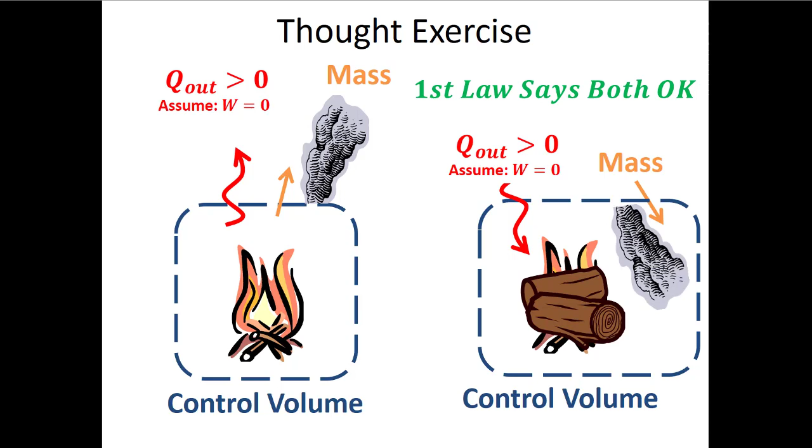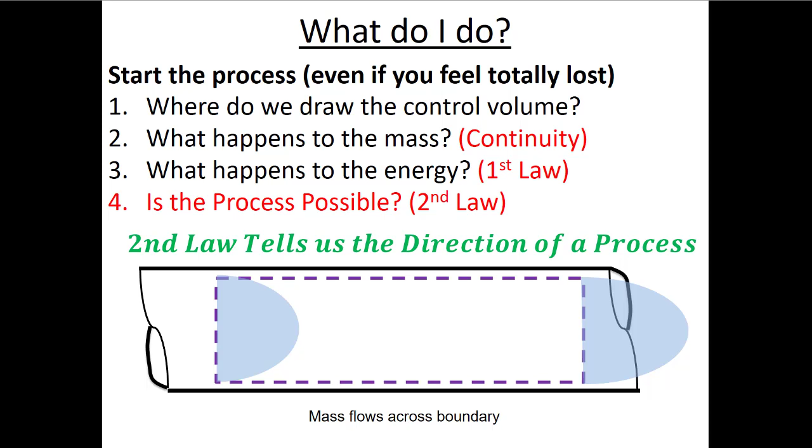So there is a natural direction that different processes follow. In order to figure that out, we have to do a second law analysis. We have to show that the amount of entropy in the universe is increasing with the process you're proposing or evaluating. Because if the entropy in the universe is decreasing as a result of this process, it means that process cannot happen. So how do we check to see if we're violating the second law?

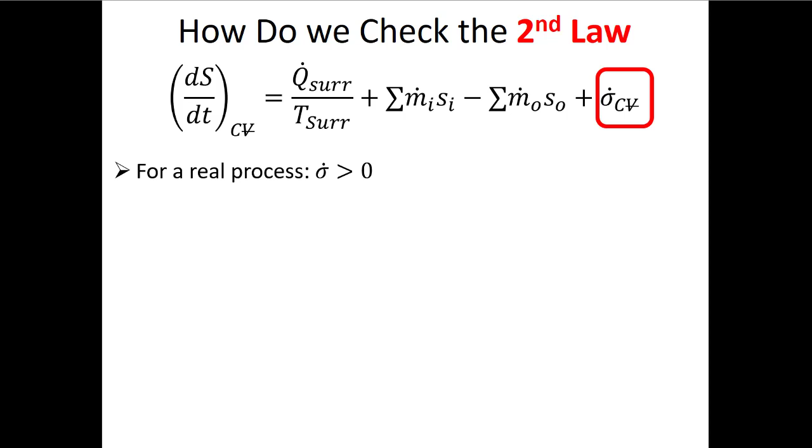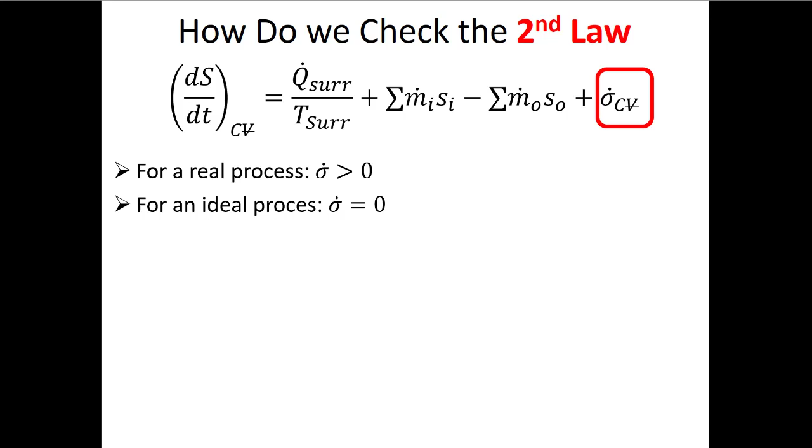So here we have the rate form of the equation, and it's really this entropy generation term, sigma dot, that's going to tell us whether or not we're in violation of the second law. For real processes, sigma dot must be positive - for this to happen in the universe, we must be generating entropy. The best we could ever hope to approach, but not necessarily attain, is this ideal process where the entropy generation rate is zero. Now this is still impossible, but it gives us the limit of what's possible.

If we ever find a process, if we do an analysis where sigma dot is less than zero, it means one of two things. First, the process is not possible, or if we know the process is possible and we're getting a negative entropy generation rate, it might mean we made a mistake somewhere in the math.

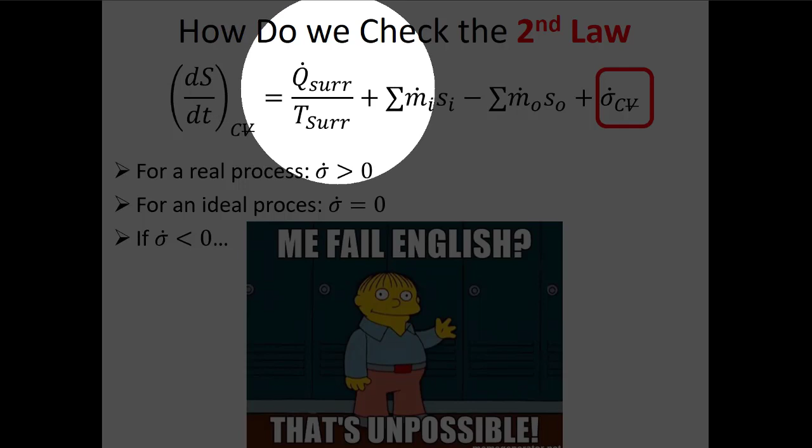Now, last class we looked at how to do a second law analysis on adiabatic processes - we looked at turbines and pumps. But a lot of times the more difficult part with the second law is adding this heat transfer term, because first you've got to get the sign of the heat transfer right. And if you trust the first law when you're calculating Q dot, you'll get the right answer for this.

But then you've got to pick the right temperature. There's two things about the temperature that we have to remember. The first is that because this is not a temperature difference, this temperature has to be in absolute temperature. So if you're doing metric, that means it's Kelvin. And if you're doing imperial units, that means it's Rankine.

Second, this is not the temperature inside your control volume. This is the temperature - I think in the textbook it talks about it being the temperature on the boundary between the control volume, between your system and your surroundings. So oftentimes we will take the temperature outside your control volume, or the surrounding temperature, as a reasonable value for this T surroundings. So when this heat transfer term sticks around, you got to get the right Q dot, you got to pick the right temperature, and you have to pick the right units for the temperature.

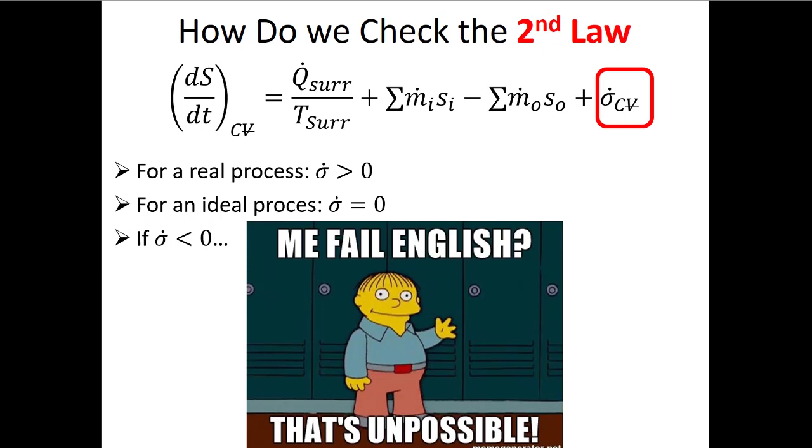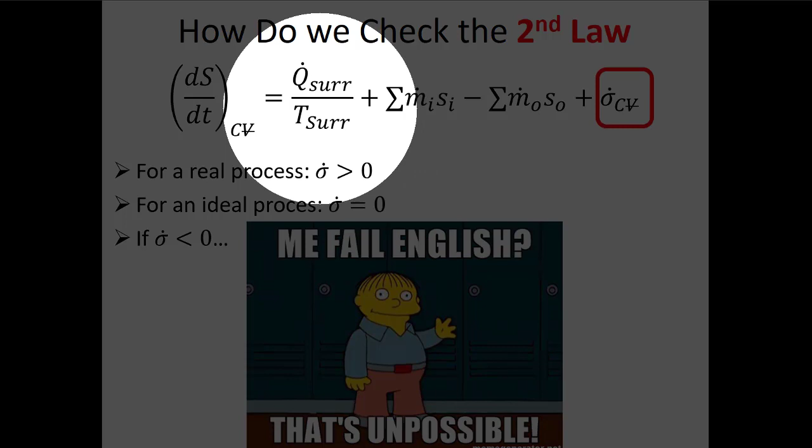So when people make mistakes on exams or on quiz questions for this type of problem, it's because they mess up this heat transfer term. So we're going to show you how to do that today.

We looked at a pump where we went from the low pressure of the turbine exit, where ideally it's still steam when it comes out, not condensed, because these turbine blades are whipping around really fast. You don't want little droplets of condensate inside your turbine because it can cause damage. So you want still steam coming out of your turbine, but it's low pressure. And because it's got less enthalpy, we want to get back to this high enthalpy state so we can run the turbine again.

Now, one of those processes: we have steam, but we want to get to water, because it doesn't take much power to increase the pressure of water. Then we need some kind of exothermic reaction, usually burning something like coal, but it could also be a nuclear reaction, which generates a lot of heat. We put that heat into our high pressure liquid water to boil it and get back to the inlet of the turbine.

So that means in our second law we also have this heat transfer term, and this term has to be bigger—there has to be more entropy generated because we're adding heat to the system than there is entropy lost by cooling this down. This isn't as much of a problem when we're heating things up, because there we're increasing the entropy. So we're going to look at the condenser here because this is the point where maybe we get a little bit of a problem, or at least conceptually you might look at this and say, oh, maybe here we're not generating entropy.

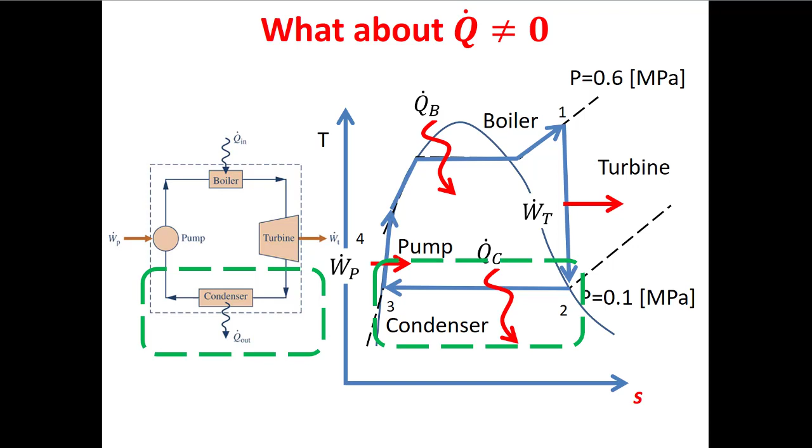So I'm going to show you that this is indeed a possible process. Here we have the condenser side of our heat exchanger. We're coming in at state 3, which is at 0.1 megapascal, and the quality is 1—this is the exit of my turbine, I have saturated vapor. Now, the purpose of the condenser is to condense this steam into liquid water, so when we leave our condenser, we have fluid coming out at the same pressure.

We're going to neglect any kind of losses from friction that would lower our pressure here, and we're going to assume that this is saturated liquid. So we've gone from saturated vapor to saturated liquid.

Now, it tells us here that the temperature on the boundary, or the temperature outside—this T infinity means kind of far away from the boundary—is 40 degrees Celsius. We'll take that as the temperature of the surroundings, which we're using as a proxy for the temperature on the border between our system and our surroundings. We're also told the mass flow rate. First we're supposed to find the heat transfer, or rate of heat transfer, Q dot, and we're also asked, is this process, this condensation process, possible? Does it still have a positive entropy generation rate when we're performing this condensation?

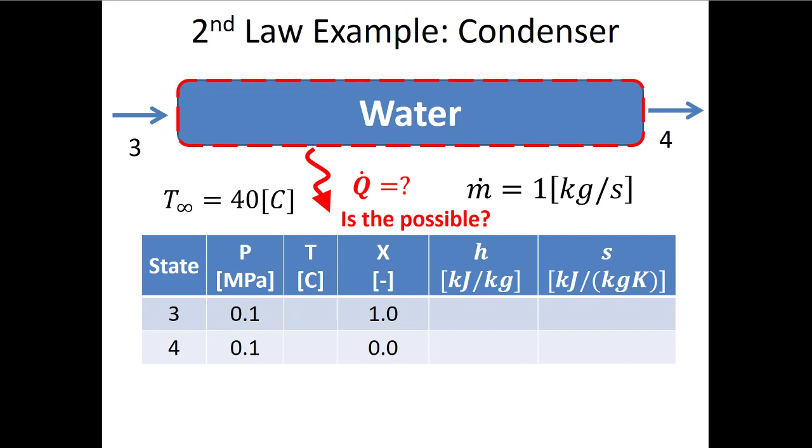So the first thing I'm going to do is draw my control volume. We've seen for heat exchangers that you can draw control volumes in different ways, but here, because I want to find the heat transferred, I'm going to only draw my control volume around the water phase. There's something else we're using to cool down this water so it condenses—I don't even know what it is, so I don't have much choice here, but it's a happy coincidence because it'll help me find this heat generation rate. So first I draw my control volume, and I want to find the symbolic solution for Q dot.

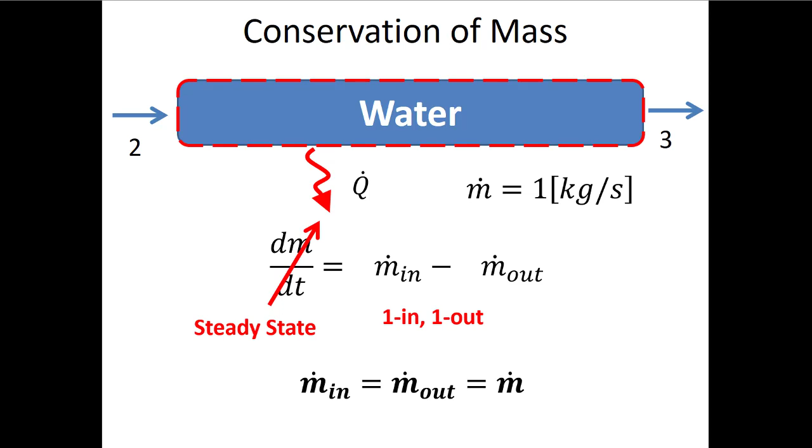So the first thing I have to do after I draw my control volume is conservation of mass. This isn't too bad because we have one inlet and one outlet, so we'll say this process is at steady state. I only have one inlet state, state 2, and one outlet state, state 3. So my summation signs in conservation of mass go away, and I find that m dot in is equal to m dot out. For this condenser, I'll only talk about one mass flow rate, so I'll drop the subscripts—it's just m dot, equal to 1 kilogram per second.

Now that I've done conservation of mass, I can do a first law analysis. I've already assumed we're at steady state with one inlet and one outlet. Next I'll assume there are no fan blades inside my control volume, so this process is passive. I'll assume the change in elevation is negligible, so the change in potential energy can be neglected, and we'll say the same about the change in kinetic energy—that can also be neglected. What we get is Q dot equals m dot times h out minus h in. Hopefully this isn't surprising—it's what we'd expect.

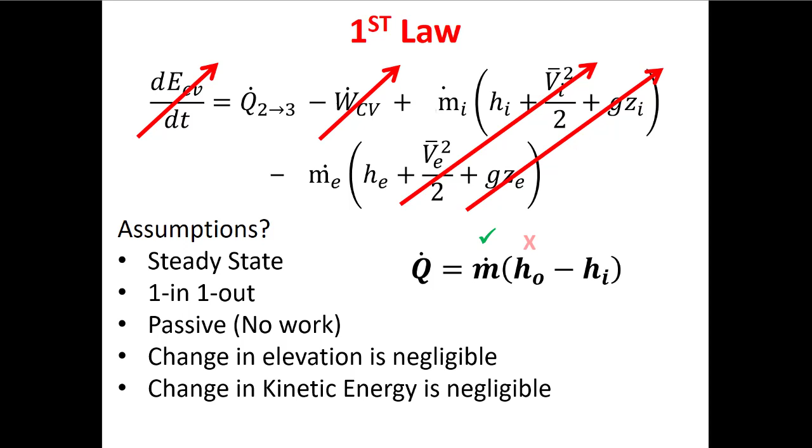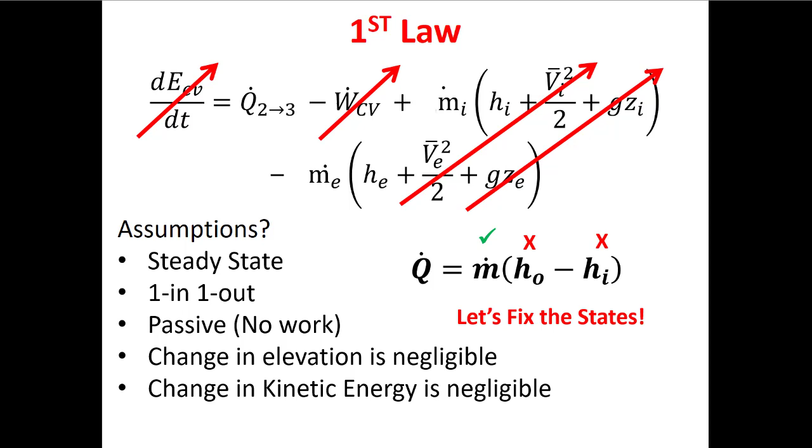So we want to know Q dot, but we don't know it yet. We're told the mass flow rate, and we've shown there's only one—m dot in and m dot out are the same. I don't know h out, and I don't know h in. So I've got one equation and three unknowns, but that's okay because I have thermodynamic tables. We'll fix the states to find these specific enthalpies. Since I'll also do a second law analysis later, I'll look for specific entropies, little s, as well.

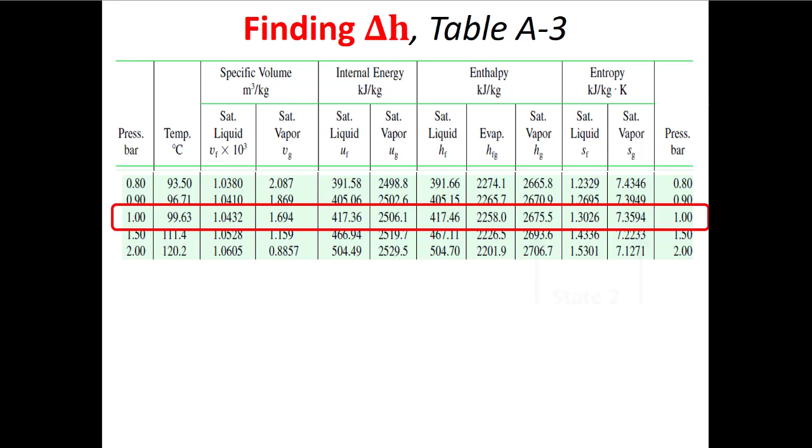So I have my state table. States 3 and 4 are given—actually, in my state table this should be state 2 and state 3, sorry about that. We're moving from a point at 0.1 megapascals, or 1 bar, with a quality of 1, to a point at the same pressure but quality of 0. First we'll fix this state, a saturated vapor at 0.1 megapascals. I go into table A3 and find my pressure—remember it's in bar, so 0.1 megapascals is the same as 1 bar. I look at this row and find Hg, since quality equals 1, and Sg, the specific entropy when quality equals 1. I'll put these two numbers into my table.

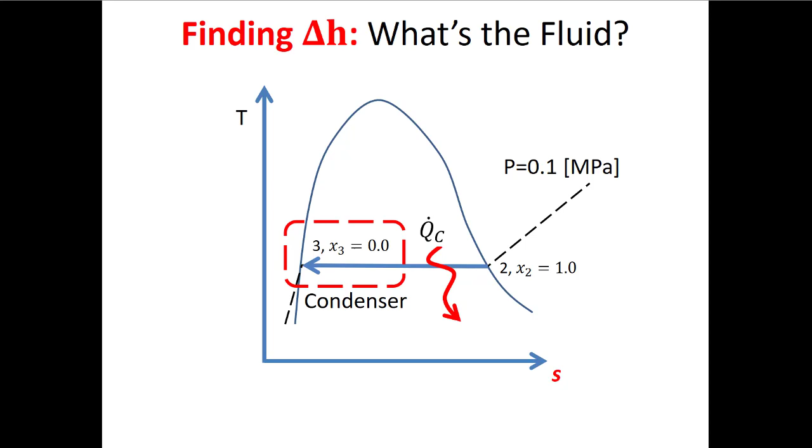Now I'm going to find state 3. Looks like I've fixed my state table—this is 2 and 3. At state 3 it's a similar situation, but saturated liquid, so the quality is 0. I'll be looking for Hf and Sf. Going back to my table, it's still the same pressure, so no interpolation required. I have Hf and Sf, and I can put those numbers into my table.

What we see here, and this is expected as we move from steam to liquid, is that we're losing enthalpy—there's less energy stored in the mass—but we're also decreasing the specific entropy. This is a little worrying because my credibility is on the line here. I've been telling you that the entropy of the universe always increases, but as my brother pointed out, the entropy of the water has decreased.

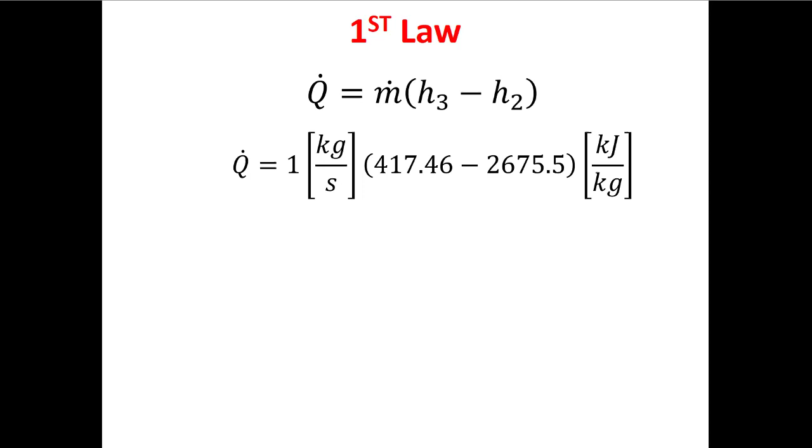But now we have enough information to find Q dot, and once we find Q dot we can move to a second law analysis. So the magic here is in the heat transfer. We'll find the heat transfer rate from our first law equation. We've already made some assumptions, and we know Q dot equals m dot times H out minus H in, so H3 minus H2 in this case. I have numbers for all of these things: m dot is 1 kilogram per second—remember, I carry my units in the calculation—H3 is 417.46, and H2 is 2,675.5.

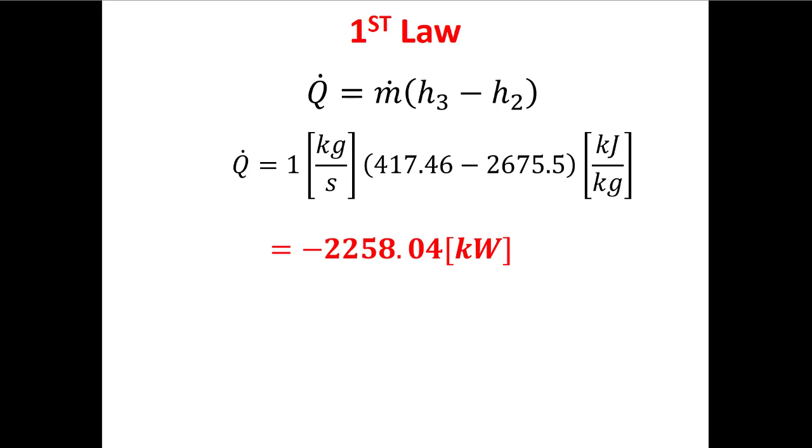Both of those pieces of information, the specific enthalpies, are in kilojoules per kilogram. So now my kilograms are going to cancel out in this equation, right? Because one's in the numerator, one's in the denominator. I'll get kilojoules per second, which I know are kilowatts. In particular, I get 2,258 and change kilowatts.

So now I know Q dot, right? That's pretty good, because that was one of the things the problem was asking me. So now I've demonstrated that I know how to do conservation of mass, I know how to do conservation of energy, and if I put those two things together, I can find the heat transfer rate, the rate at which heat is leaving the water because of this condensation process.

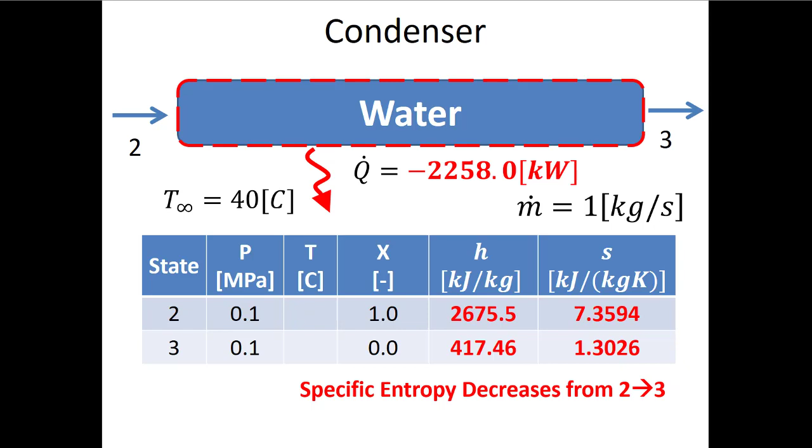So I see here, and maybe I'm a little nervous about this, that the specific entropy has decreased from 7.35 to 1.3. So is this process possible? Because the entropy of the water is decreasing.

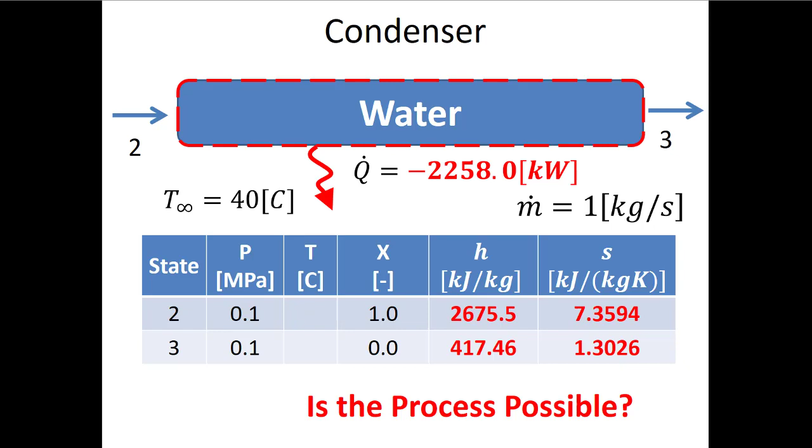But it's not really the entropy of the water that we're concerned about. Instead, this sigma dot term, this is the rate of entropy generation in the universe, not in the water. Now, the water's part of it. We'll see here that the water's part of it, but this heat transfer term sort of tells us about the entropy generation that's going on in the universe outside of our control volume because of this process.

So our surroundings are increasing in entropy because of this heat transfer, right? So is that enough that we're going to end up generating entropy in the universe? So here we've already said that it's steady state and it's one inlet and one outlet. Here we can't assume that this process is adiabatic because we know heat transfer happens. That's the whole purpose of a condenser.

So now, if we solve for, or isolate sigma dot, this entropy generation rate, we're going to get negative Q dot surrounding. So this is the heat transfer from the system to the surroundings, the same heat transfer that we're going to solve for in the first law. We've already done that. And this is the temperature outside of my control volume, plus m dot times S out minus S in. The good news is we have all this information.

So here, in this case, S out minus S in gives us a negative value. Now that's not necessarily great because here we want to have a positive value for entropy generation. So here we've got opposite terms.

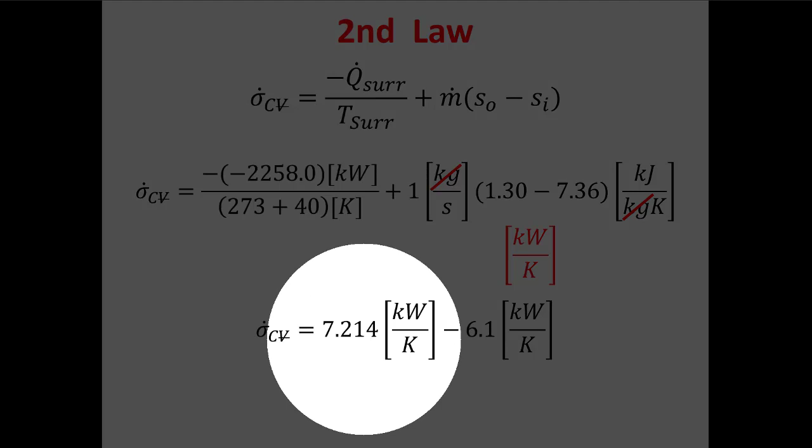Now, what I see in this case is that I get 7.214 kilowatts per Kelvin. That's the rate that entropy is increasing because of this heat transfer term. And then the entropy decrease that happens because the water is decreasing in entropy as it moves from a vapor to a liquid is minus 6.1 kilowatts per degree Kelvin. So the total entropy generation rate is positive.

So from that, I know that this condensation process is possible because I've checked that we passed the first law. I know that we conserve energy, and now I know that I'm generating entropy with this process. So I know that this whole process is possible.

So this is one way to look at the second law. We can look at the second law from a process to process state, and we can use a rate equation just like we've been using for conservation of energy. But like so many things in science and even outside of science, there's more than one way to look at this kind of a problem, right?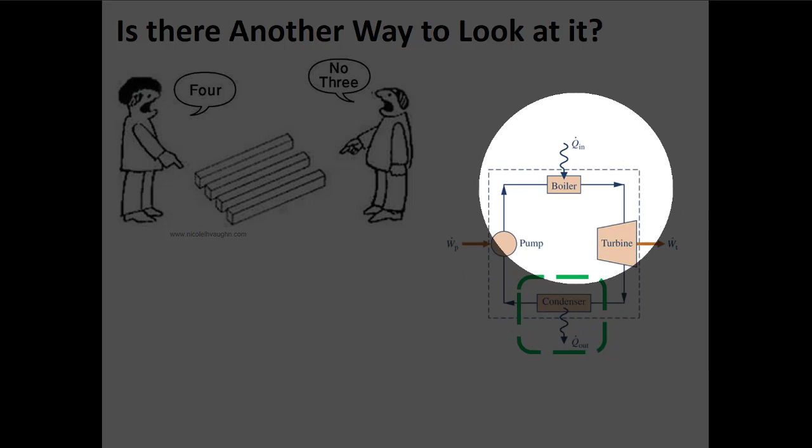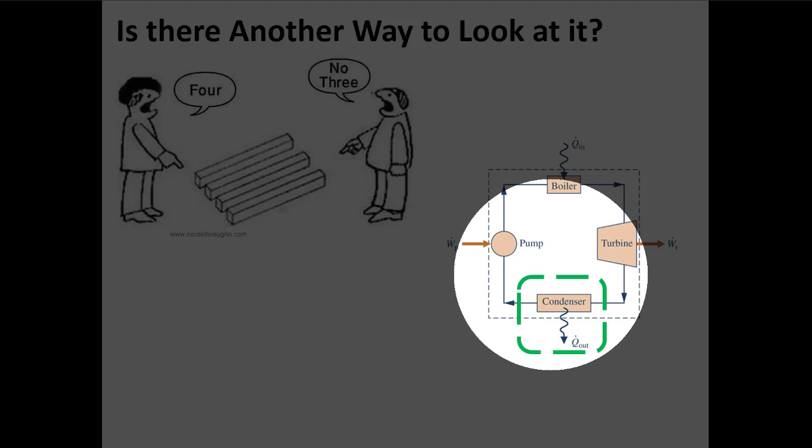So we've been looking at stringing these things together, right? And, you know, it's a bit of a spoiler here, but this is a heat engine, right? Because what this does is we're putting heat in to boil the water. So we get to this turbine and we produce power. Now there's some cost, so that power we get from the turbine is not free, right? So there's some power to run the pump. And we have to reject some heat here. But in general, we're adding heat. There's a net heat addition. And there's going to be some net work produced. So this is a heat engine.

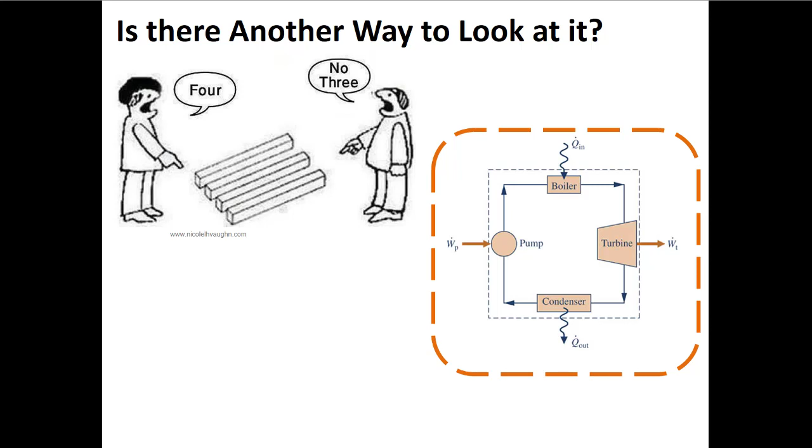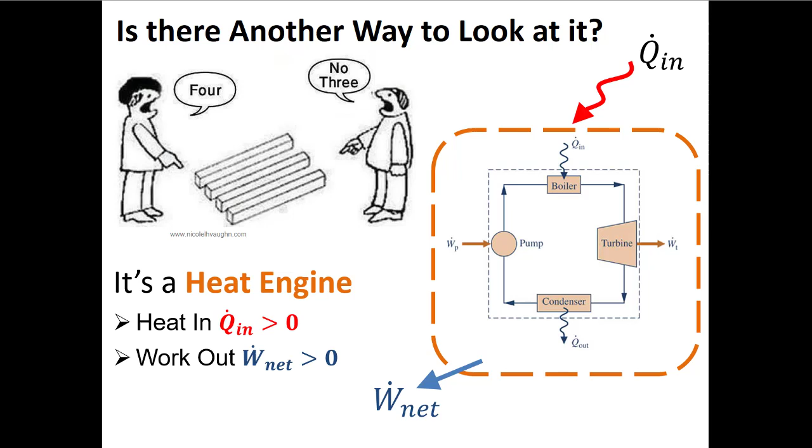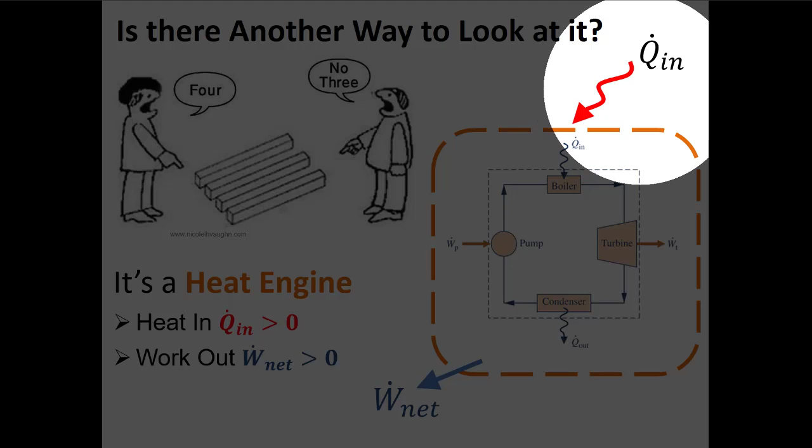So I can zoom in on each of the individual components and do this rate version of the first law to look at what's going on. Or I can look at this heat engine as a whole, right? So if I look at this heat engine as a whole, what's happening is we're adding heat and we get net work out. So one of the ways we quantify these heat engines is we say, okay, so I got to burn some coal, right? And when I burn some coal, that adds some heat into my system. How much of that heat goes into net work, right?

And so there were some people that looked at this, right? And this probably happened somewhere around the time of steam engines where people were interested in how these heat engines kind of work, right? And there's this statement that the textbook talks about from Lord Kelvin and Max Planck that says: it is impossible to construct a device which operates on a cycle, so that it keeps operating at steady state, and produces no other effect than the production of work and the transfer of heat from a single body, right?

So I think what this version of the statement, at least what I think about when I read this statement, is that you can take heat, you can burn some coal, maybe burn some gasoline, right? And you can get some mechanical work. The problem is, because of irreversibilities, this engine that you have is going to get hot, right? So there's things like pistons moving up and down that are generating friction. And that heat has to be rejected somehow.

But we can't reject that heat from the engine back to the hot reservoir, because heat's got to go from hot places to cold places. So this engine can't get hotter than the hot place, because then it would be rejecting heat to the hot place and you wouldn't be able to add this heat.

So in order for a heat engine to work, you need to have a heat sink. So you can burn gasoline and make an internal combustion engine create work or power. But that engine's going to heat up, so you need to have a cold reservoir that's cooling it down, right? So you need to have some mechanism by which this engine is communicating with the universe, the surroundings, to cool itself down. And that happens through things like radiators in a car.

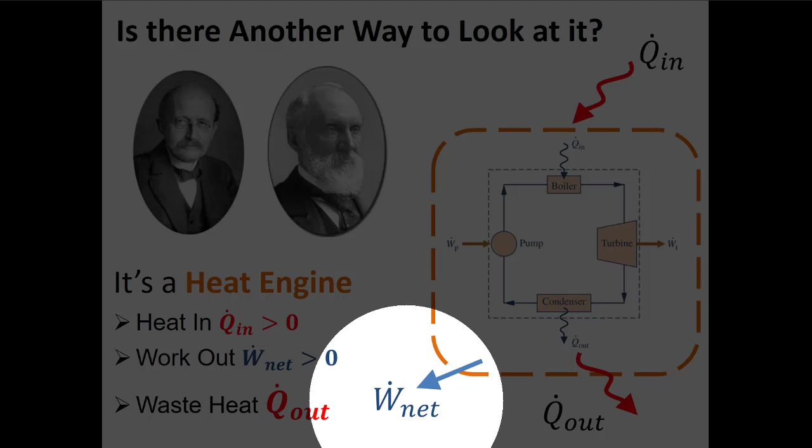So is there another way to look at this? We have this heat engine, there's heat coming in, work going out, and we know we need a heat sink somewhere inside our system. So there's some waste heat that happens, and this is unfortunate because ideally, we'll end up talking about efficiency here. In an ideal world, even though we couldn't get there in a thermodynamically ideal case, the absolute best scenario would be if we could take heat, put it into a machine, and turn all that heat into work. But that's not possible. It's not even the limit of what's possible, because we have to reject some heat.

So if we look at this whole system, even though each individual component inside our heat engine - this is what a very simple version of a coal-fired or nuclear power plant would look like - it's a series of open systems strung together. But if we zoom out and draw our control volume at the orange dotted line, or the dotted line in the textbook, we see that this is a closed system. Even though it's made up of a bunch of open systems, all the mass - here I've got water going through my pump, through the boiler, through the turbine - it's all one inlet, one outlet, but they're strung together. So it's a closed system if I widen my lens enough.

So in a closed system, we could take the rate equation of a closed system. We'd get rid of - this is the same first law we dealt with before, where delta E equals Q minus W, but we divide by delta T and take the limit as delta T approaches zero. You can think of this as the open first law, but the mass flow rate terms go away because there is no mass flow rate in or out. So this is the rate version of the closed system first law. If my system is at steady state, then the net heat is equal to the net work.

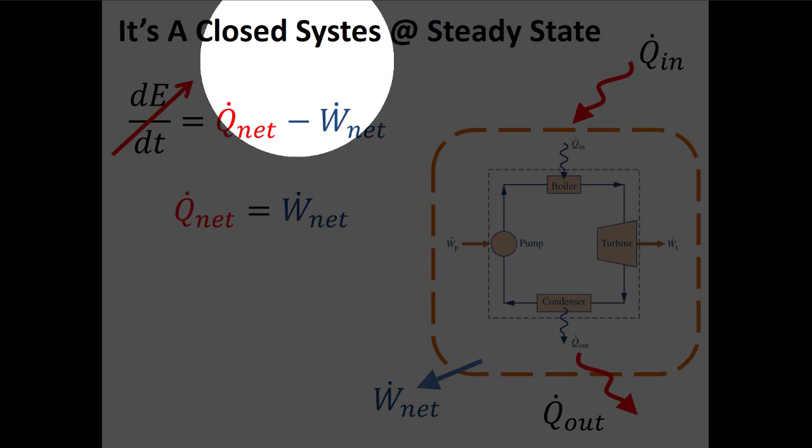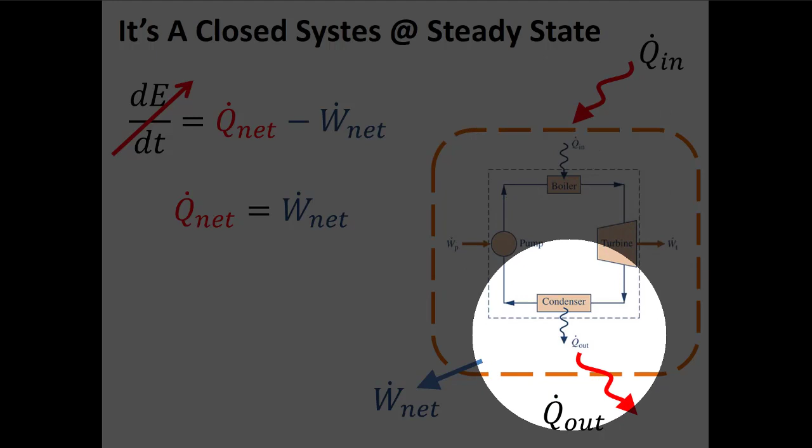So if I add up all the heat that comes in and subtract all the heat that goes out, that's my net heat. And I add up all the power generated by my turbine, but to get there I had to plug this pump in, so I have to subtract the power produced by the pump. When I talk about adding and subtracting, I'm doing a bit of what the textbook does, saying these things are absolute values. But in truth, the first law tells us the power produced by the turbine is positive, and this is negative. So really I'm just adding a positive number plus a negative number. Same thing with heat - heat in is positive, heat out is negative. So really I'm adding these things up to get the difference in magnitudes, and one gives me net heat, the other net work, but they're the same.

So Q dot in minus Q dot out is going to be equal to W dot net. So really, when I'm looking at a whole system like this, if I know the net work, I also know the net heat. Or if I know the net heat, I also know the net work.

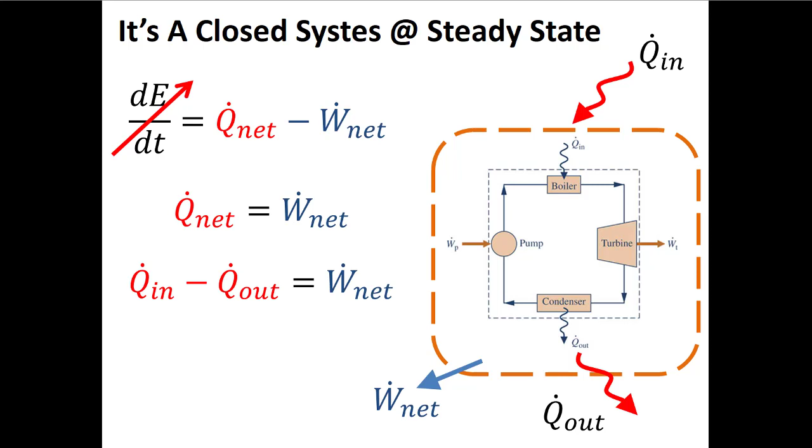So this is good. So we're going to define this term - this is called thermal efficiency.

Now maybe it's because I teach heat transfer, but sometimes I'll talk to people later in their courses, and they'll be talking about how in heat transfer we do case studies where people design systems and analyze their solution. I'll ask, why did you pick that? And someone will say, oh, because it's more efficient. I think that's because colloquially, the word efficient has come to mean good - I picked that one because it's more good. But because I teach thermodynamics, I kind of hate it when people use the word efficiency without defining what that efficiency is.

In thermodynamics, we'll talk about several different types of efficiencies, and they're all fractions that go between 0 and 1, or 0% and 100%. This is not sports where people think you can give 110%. A thermal efficiency, you can only ever get up to 100%, and actually you can't even get anywhere near that, as we'll see.

So this is thermal efficiency. Now, for all of these different cycles, we're going to talk about a way to characterize the cycle. Generally, what we're going to say is that the cycle's desired energy effect divided by its energy cost to achieve that effect gives us whatever characterization parameter we're looking for. For heat engines, the desired energy effect, the reason I'm running a power plant, is to generate power, and the cost that I pay is that I have to burn something, or maybe perform some nuclear reaction, to add heat in.

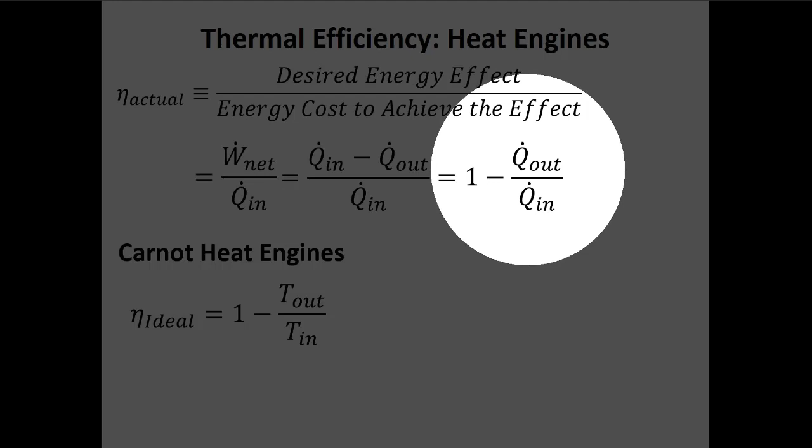But what happens is, if we assume that the process is ideal, that all the processes in the system are ideal, we can approximate this Q dot out over Q dot in term as a ratio of the temperatures at the outlet divided by the temperature at the inlet. Now again, the hair on the back of your neck should stand up, because here we have temperatures that are not temperature differences. Anytime we see a temperature alone in an equation and it's not a delta T, that means we have to use absolute temperatures.

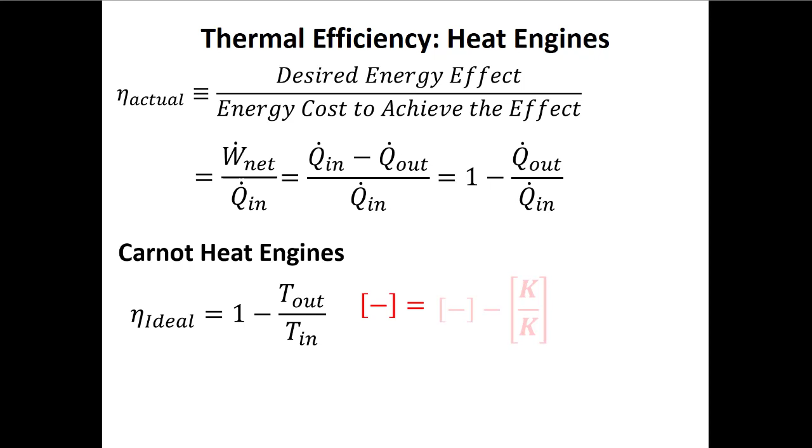So we can get an approximation for the ideal heat engine if we take 1 minus T out divided by T in. We can check the units here: this is a per unit value, it'll give us something between 0 and 1, that's like a percentage divided by 100. This is going to be - 1 has no units, and Kelvin divided by Kelvin also has no units.

So this is a dimensionless equation, right? This is going to be a way we could use it if we knew the heat transfer rate from the ideal engine out and in, or the net work from the ideal engine and the heat in from the ideal engine. We could calculate the ideal engine this way too.

But as a shortcut, if we knew the temperature that we're rejecting heat to and the temperature that we're adding heat in, then we can just use this equation to find the ideal engine. This analysis we can only do for Carnot engines or ideal engines. This equation we can do for real engines or for ideal engines.

Now, ideal engines are always going to perform better than real or actual engines. So the ideal thermal efficiency is going to be higher than the actual thermal efficiency. This is another way, right?

So one way to see that a process can't possibly happen is to do the second law analysis and see that the entropy generation is negative. We know that that means it wouldn't be possible. If you ever have a cycle and you do an analysis like this and someone is claiming that they get actual thermal efficiencies that are better than the Carnot efficiency for whatever engine you're talking about, then you know that's not possible. They must have made a mistake, or maybe they're more nefarious and they're just not telling the truth.

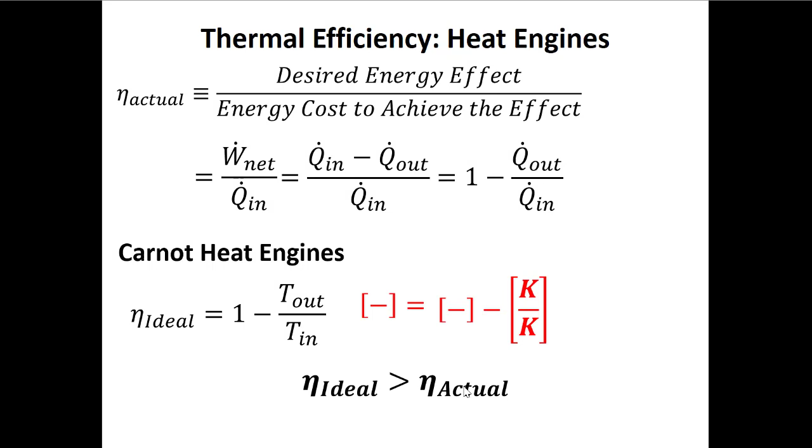So here's a heat engine example. Here we have this heat engine, which the textbook draws as a box with a circle in it, and we have this hot reservoir and a cold reservoir. We know that the hot reservoir is 150 Celsius and the cold reservoir is 50 degrees Celsius.

We know that the heat transfer rate in is 100 kilowatts. What's the maximum possible net work that we could generate from this system?

So we know that the maximum thermal efficiency, the Carnot efficiency, is going to be 1 minus T cold divided by T hot. But we know that those temperatures have to be in Kelvin. They were given to us in Celsius, so we convert those. And here we get that the maximum thermal efficiency in this case is 0.24 or 24%.

So that means the most we could ever get out of this heat transfer rate of 100 kilowatts that we're putting in, the best we could do is 24 kilowatts of work. So I take this, I know that the thermal efficiency is 0.24. That's going to be the net work divided by the heat transfer rate in. I take the heat transfer rate in multiplied by 0.24, and I get the 24 kilowatts.

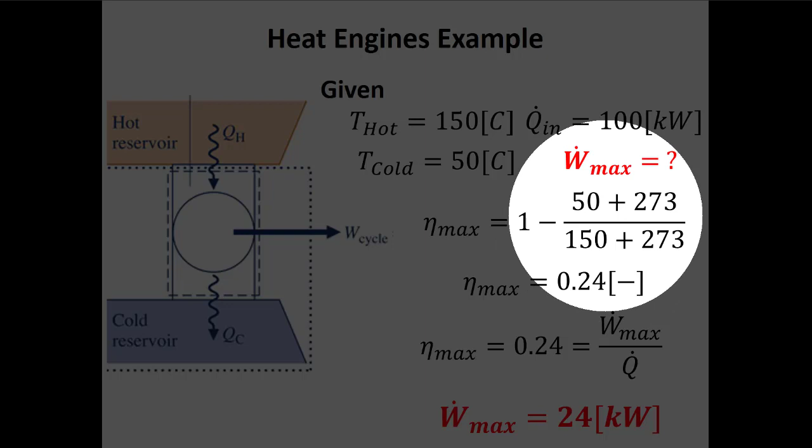So here, because this maximum thermal efficiency is going to be 1 minus T cold over T hot, if I could reduce T cold to very cold, or if I could increase T hot to very hot, then my thermal efficiency would go up. But in this case, it's 0.24, or 24%.

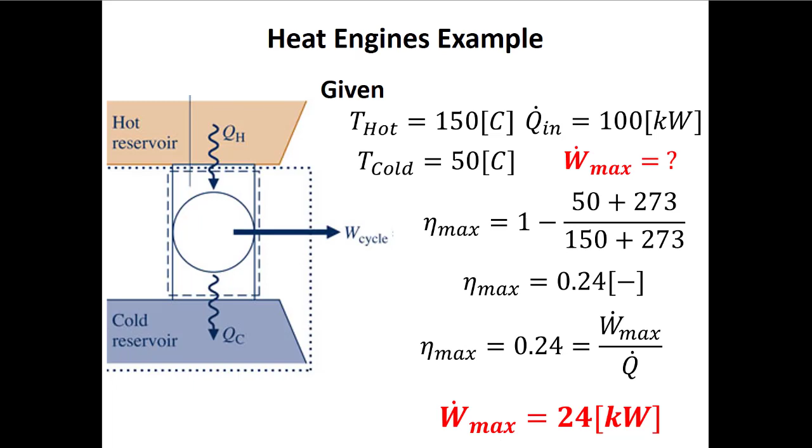Now there's another way that we can look at the second law, and this is called the Clausius statement of the second law, named after Rudolph Clausius. What it says is it's impossible to construct a device which operates on a cycle whose sole effect is transfer of heat from a cooler body to a hotter body.

So what this means, I think, because when we just look at the words, it's sometimes hard to explain. You know that we can make machines that transfer heat from a place that's colder to a place that's hotter.

You know this because probably you've used a refrigerator. In your fridge, maybe it's 4 degrees Celsius inside the body, and in your room it's maybe 20 or 21 degrees Celsius, and yet the refrigerator removes heat from inside the fridge and expels that heat to the room.

And the way we do that is we build a machine where this machine has a cold side down here and a hot side over here. The cold side is colder than the thing you want to keep cold, and the hot side is hotter than whatever room you're pushing heat into.

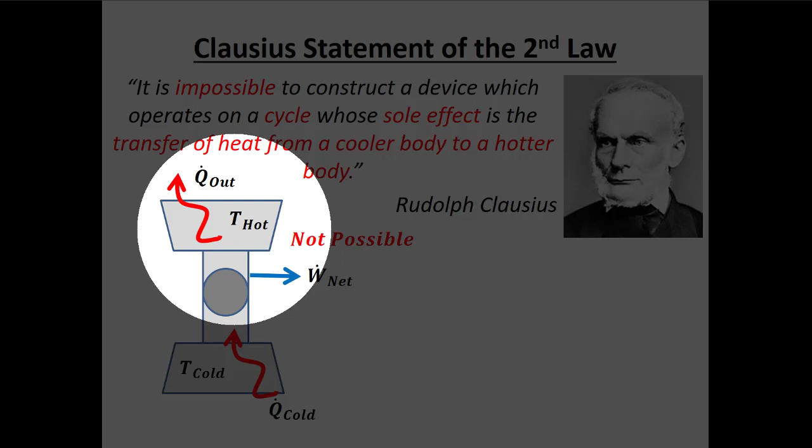And that's still true. It doesn't look like it in this machine because it looks like we're transferring heat from this cold place to this hot place. But really, we made this side of the machine colder than here, so we're transferring heat from our cold side, which is hotter than the cold side of the machine. And then we have a hot side of the machine, which is hotter than our exterior temperature.

So what this means when it says that its sole effect is the transfer of heat from a cooler body to a hotter body, I think what it's talking about is it's not just the heat transfer that matters here. We can't create a machine that's transferring heat from cold places to hot places and producing power. We can't even produce a machine that transfers heat from a cold reservoir to a hot reservoir that has net work of zero.

One of the things you probably know about your refrigerator or air conditioner is that you have to plug it into the wall. So in order for us to make a machine that transfers heat from a cold reservoir to a hot reservoir, we have to add mechanical work. This is the opposite of a heat engine: whereas in a heat engine we're putting in heat to generate work, in a system like a refrigerator we're putting in net work so that we can trick the universe into moving heat from a colder place to a hotter place.

So here we have another characterization parameter, and it depends: we can have a heat pump or we can have a refrigerator. The difference between a heat pump and a refrigerator from a thermodynamic perspective is where you are. If you're a person sitting in the hot part, you have a heat pump, because the purpose of a heat pump is to heat up the hot side.

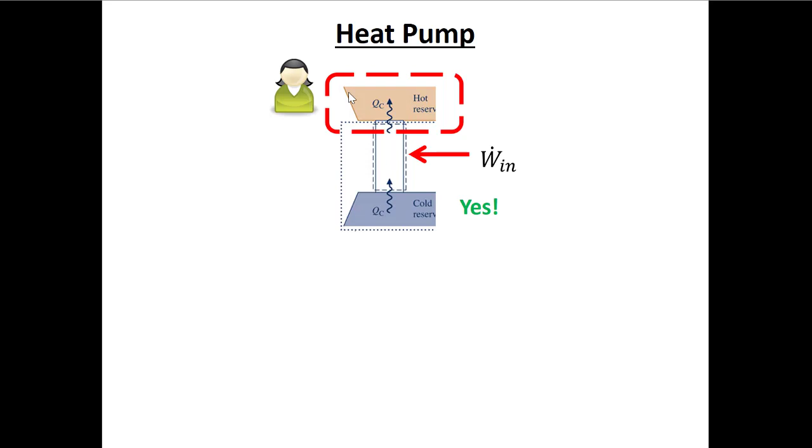This is kind of like if you had a heat pump heating your house in the wintertime - it's cold outside, but you're trying to push heat into where it's hot. So your perspective is sitting here on the hot side. Yes, we can do this, and a heat pump is transferring thermal energy from low temperature outside to a high temperature inside.

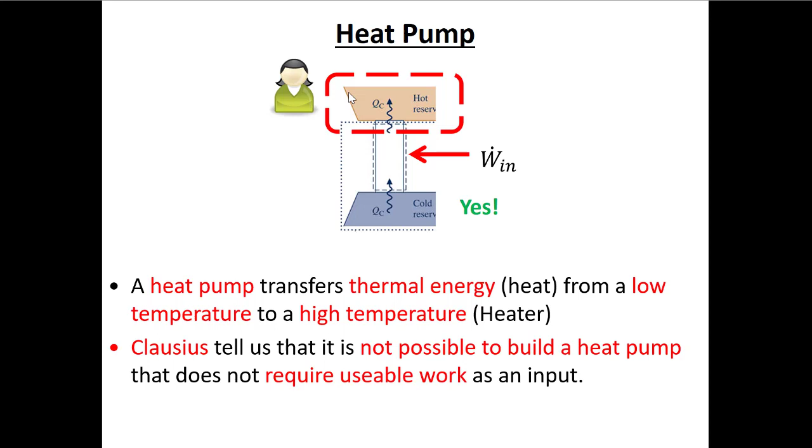So Clausius tells us, the Clausius statement tells us, that it's not possible to build a heat pump that does not require usable work as an input. So you have to put work into the system for it to happen.

Now, we can characterize this kind of cycle too, but we cannot call it an efficiency, because these characterization parameters often get to be more than one. And I told you it's not like sports, there's no more than 100%. So here we have something called a coefficient of performance.

If you have a coefficient of performance for a heat pump in the real world, this is going to be gamma actual. Again, all of these characterization parameters are the desired energy effect divided by the energy cost to achieve that effect. So if you're doing a heat pump, your desired energy effect is to add heat to the hot place - this is the heat transfer rate into the hot place.

And the cost is that you have to plug this thing into the wall. So there's some net power that you have to add to the system.

So the coefficient of performance for heat pumps is equal to gamma. You don't have to remember the different Greek letters on tests if you don't want to, you can just put coefficient of performance. Specify that it's a heat pump in the superscript, and whether you're talking about actual or ideal in the subscript. So here we're going to have Q dot hot over W dot net.

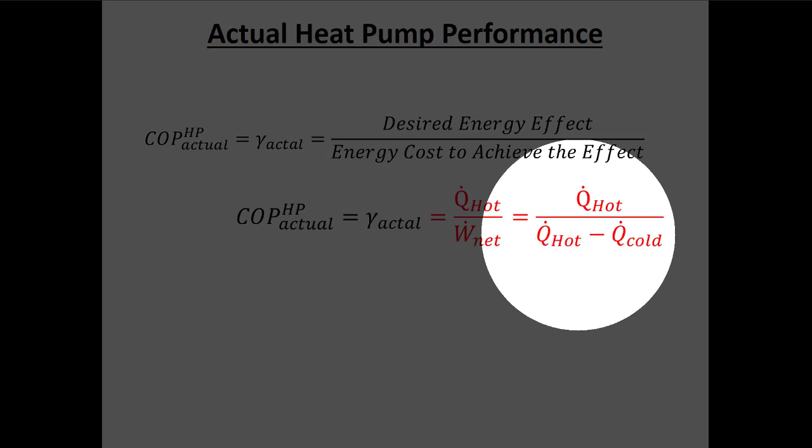We know that W dot net, because this is a closed system, is Q dot hot minus Q dot cold. So this is true for ideal systems, but also true for actual systems.

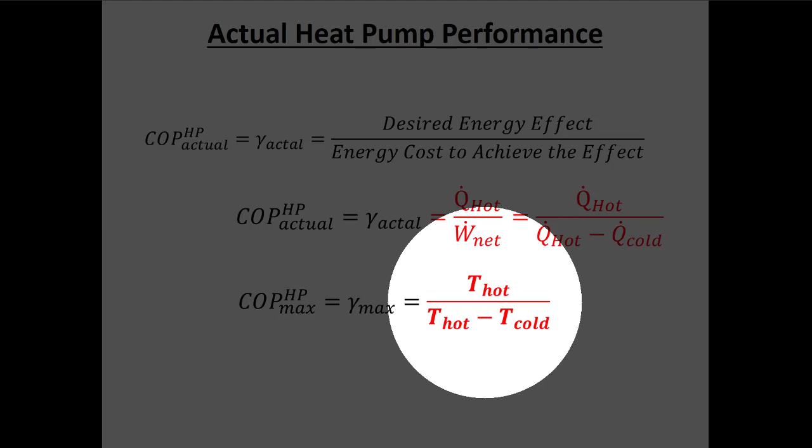But if we'd like to do this for ideal systems, we can substitute our heat transfer rate terms for temperatures. We see that it's a delta T on the bottom, so I could use Kelvin or Celsius, but on the top this has to be in Kelvin. So I'm going to tell you, if you're going to do these kind of calculations, it's probably better off always to use Kelvin or Rankine, and then you know you won't mess it up. So this is the ideal coefficient of performance for a heat pump: T hot divided by T hot minus T cold, or Q dot hot over W dot net.

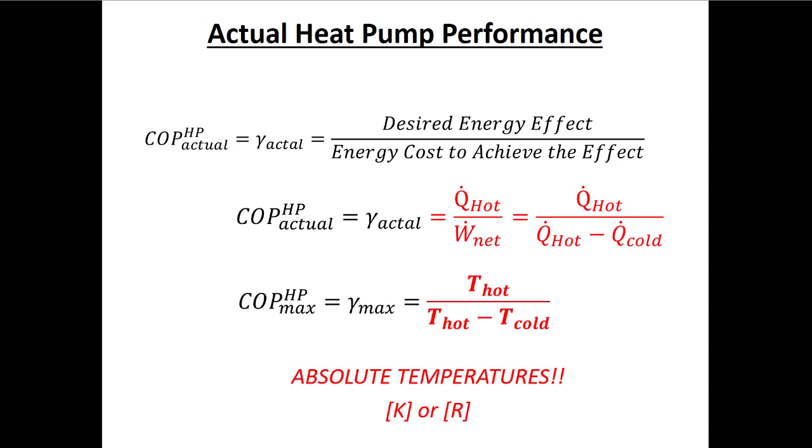Again, in the numerator especially, we always want to use absolute temperatures because that's a temperature that stands alone. It's not a delta T.

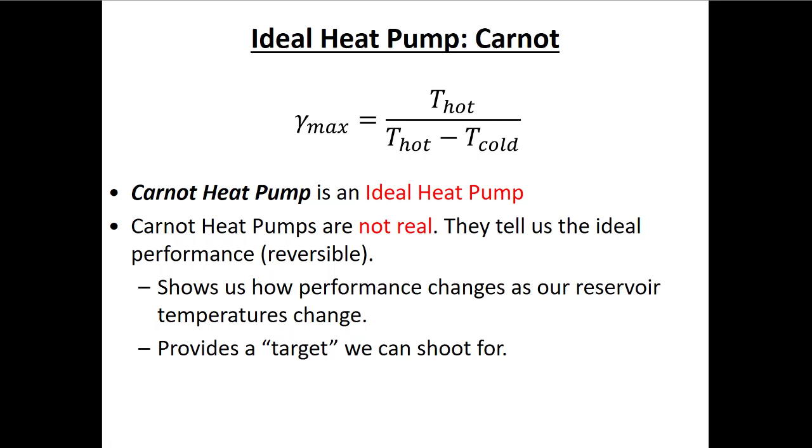So the Carnot heat pump is just an ideal heat pump. Carnot heat pumps are not real, it's like the tooth fairy. We can't ever get to that performance, but we can sort of asymptotically approach it, at least theoretically. And it shows us how performance changes as we change the temperatures. So even though some people might say it's a useless equation because we can never get to that level of performance...

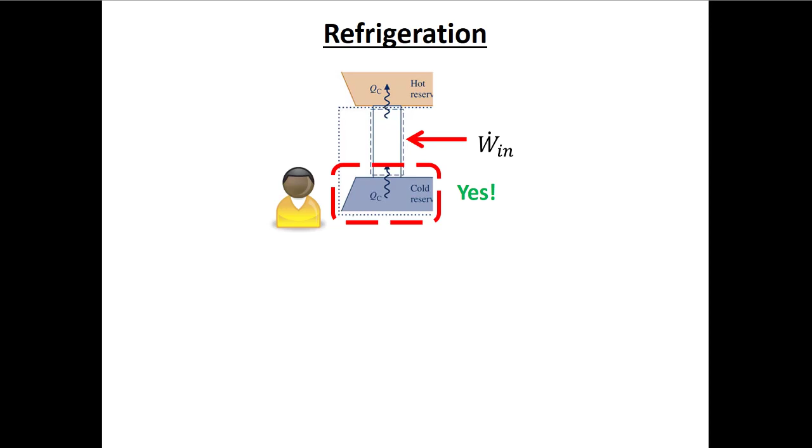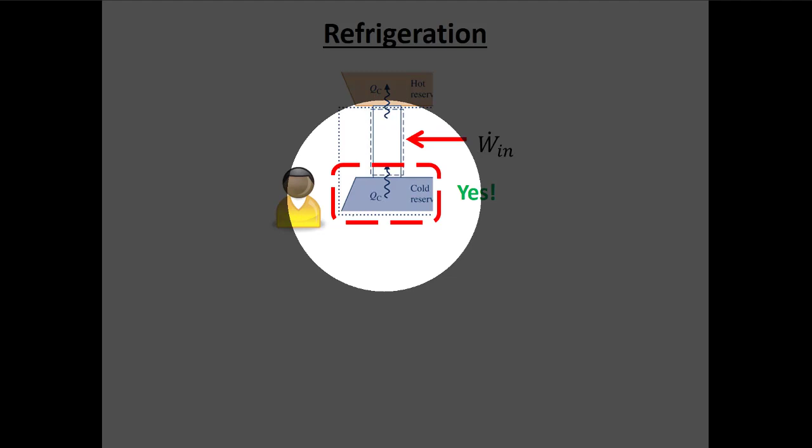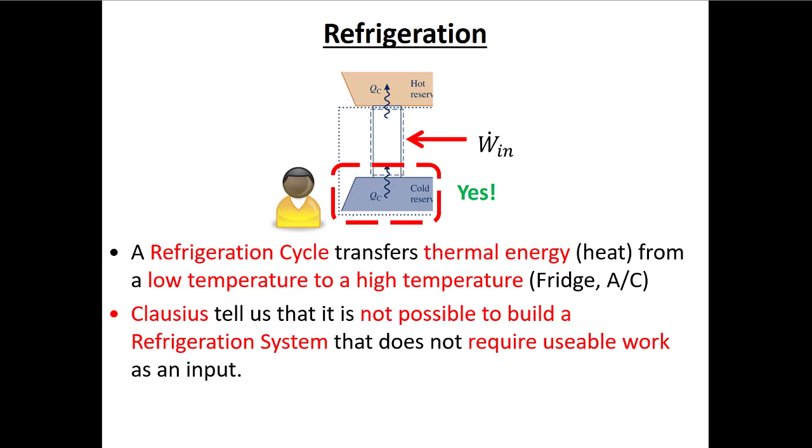But looking at this equation tells me how I can change T hot and T cold to try to get better coefficients of performance. We can also look at coefficient of performance for refrigeration units. If you're trying to run a refrigeration unit, maybe to keep your house cold in the summer, the thing you're concerned about, the energy benefit, is removing heat from the cold place. So refrigeration cycles are transferring energy from a low temperature to a high temperature, just like a heat pump. But the difference is the benefit we're worried about is how much heat we're removing from the cold side. And again, the Clausius statement tells us that we can only do this if we're adding work to the system. That's why you got to plug your fridge into the wall.

Again, we have a coefficient of performance for refrigerators. This time our Greek letter is beta. I try to remember this because beta looks a little bit like an R, and R is for refrigeration. It's not perfect, but it definitely looks more like an R than a gamma does.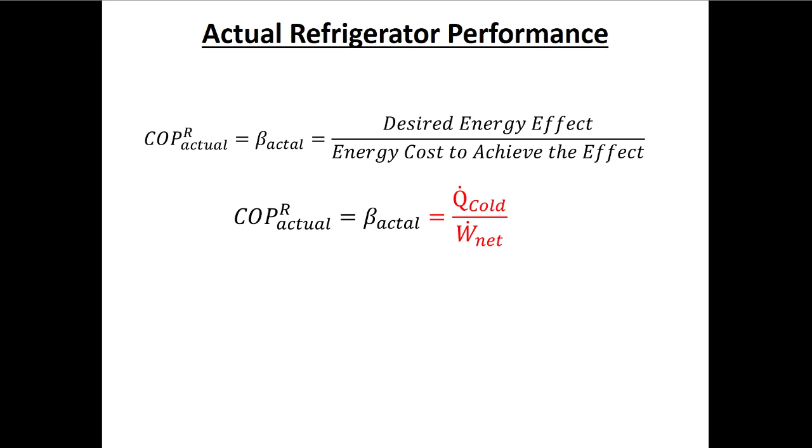So here, again, we have the desired energy benefit divided by the energy cost. Because we're standing on the cold side in the refrigerator, what we want to be able to do, our benefit, is remove heat from the cold side, and we have to add work to do this. This looks just like the coefficient of performance for a heat pump, except in the heat pump our energy benefit was adding heat to the hot side, and here we're removing heat from the cold side. Again, we can use our first law on the whole system to show that W dot net is equal to Q dot hot minus Q dot cold.

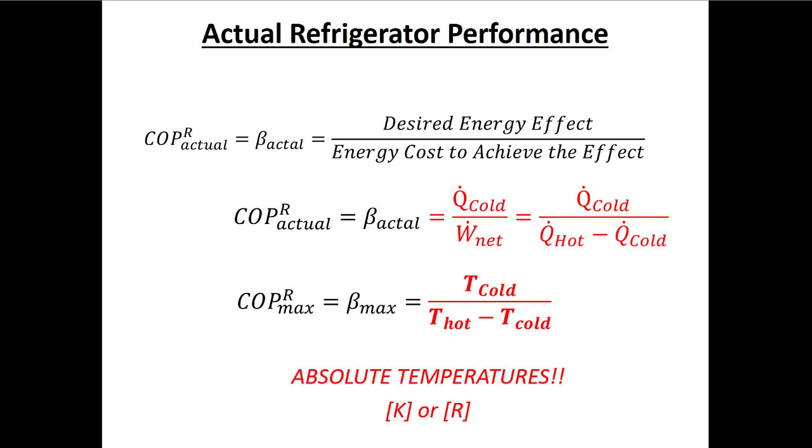If we look at the Carnot coefficient of performance for refrigeration, we turn the Q dots into temperatures. Again, I have a temperature that stands alone up here, so I need to use absolute temperatures. The difference is that it's the cold temperature that's on top, because in the refrigerator we're interested in the cold side. Again, we want to worry about absolute temperatures here.

So Carnot refrigerators are also not real. You can never have a Carnot refrigerator in your house, but having this equation again tells us some parameters we can tweak to try to get better performance. So even though this is an imperfect model, engineers could still use this to try to get better performance out of an existing component like a refrigerator.